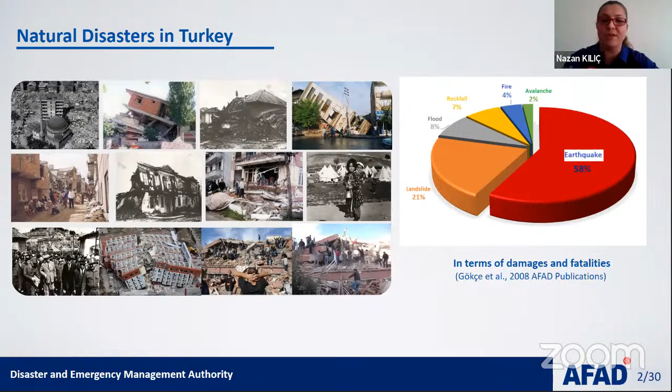The earthquake activity in our country and its surroundings has been observed by AFAD with more than 1,100 seismic stations, and the map shown in this slide shows the distribution of these seismic stations.

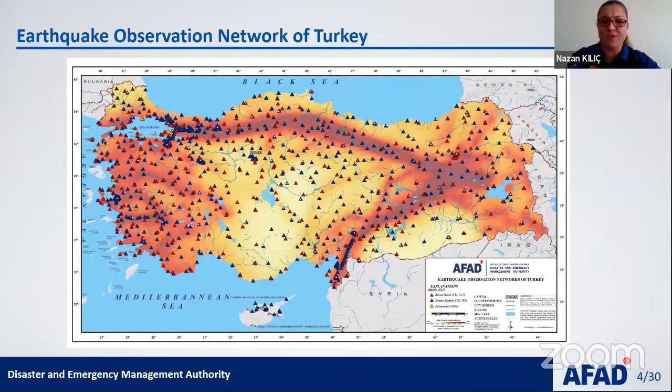If you look at the historical development of official earthquake zoning or hazard maps of our country, the origins of the first official map date back to the 1939 Great Erzincan earthquake. This earthquake was followed by a series of large earthquakes on the North Anatolian Fault.

In 1944, the law on measures to be taken before and after earthquakes was enacted. In accordance with one of the provisions in this law, the first earthquake zoning map of our country was prepared and published in 1945. This, due to increased information on the seismotectonics of our country, advances in engineering seismology and...

...developments in the world, this map was revised and published several times, and the last one, the earthquake hazard map of Turkey, was published in the Official Gazette in 2018, and it has been in force since the beginning of 2019.

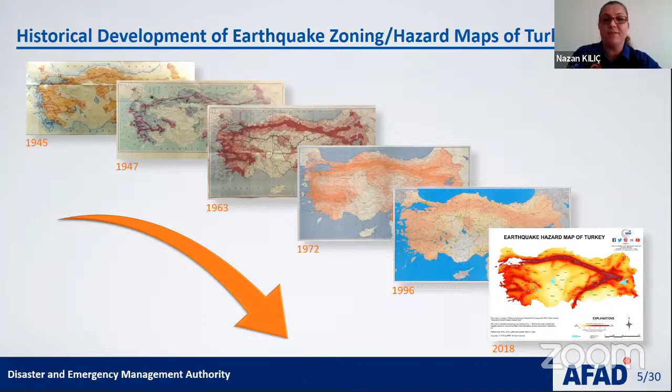The new earthquake hazard map of Turkey is one of the objectives in our National Earthquake Strategy and Action Plan, abbreviated as UDSEP-2023. This strategy and action plan can be defined as our national roadmap for earthquake mitigation.

The principal objective of the plan is to constitute new earthquake resistant, safe, well-prepared and sustainable settlements, and so to prevent or mitigate the physical, economic, social, environmental and political harms and losses that may be caused by earthquakes.

There are 7 targets, 29 strategies and 87 actions in the plan. They are presented under 3 thematic groups: learning about earthquakes, earthquake safe settlement and construction, and coping with the consequences of earthquakes. Although targets, strategies and actions are given under 3 thematic groups, they are mainly interconnected to each other.

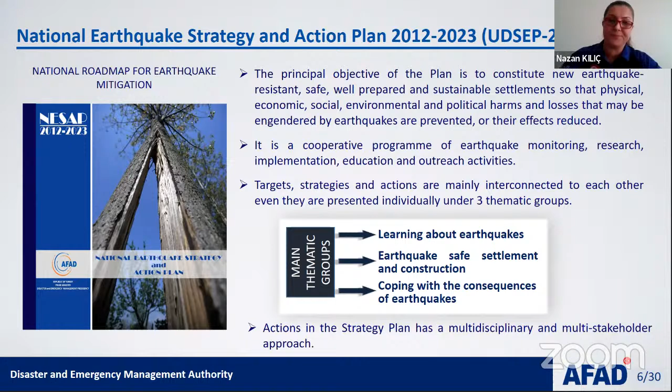In accordance with its general scope, risk reduction activities are dominant in UDSEP-2023, but there are some actions devoted to the development of emergency management and post-disaster recovery activities. So UDSEP-2023 contributes to the mitigation, preparedness, response, and recovery phases of the disaster management cycle.

Earthquake hazard analysis and revision of hazard maps are one of the objectives in UDSEP-2023. A project was initiated in 2013 to revise the previous earthquake zoning map of Turkey.

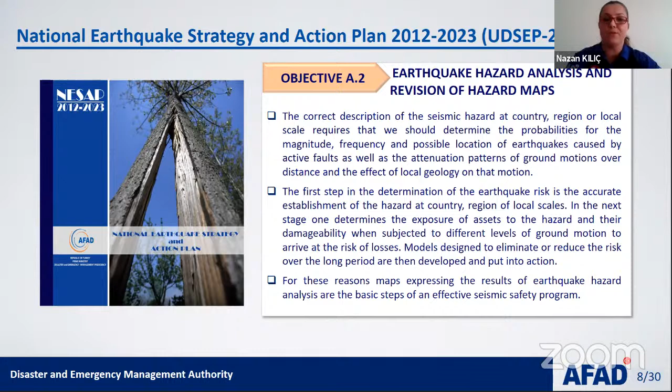The project, the revision of the Turkish seismic hazard map project, was supported by AFAD within the scope of the National Earthquake Research Program. The Turkish Natural Catastrophe Insurance Pool also supported the project.

The project team consists of researchers from 2 public institutions, AFAD and the General Directorate of Mineral Research and Exploration, and 5 universities: Boğaziçi, Middle East Technical, Çukurova, Sakarya, and Akdeniz universities.

In the project, probabilistic seismic hazard analyses were performed by utilizing up-to-date seismic source models, earthquake catalogs, ground motion prediction equations, and so on. Earthquake hazard maps in terms of peak ground acceleration, peak ground velocity, and spectral accelerations at 0.2 second and 1 second periods are produced for different return periods, that are 43, 72, 475, and...

...2475 years return period. I should note that these maps were produced for a generic rock site condition. The new earthquake hazard map of our country is a product of this project.

It shows peak ground acceleration values having 10% probability of exceedance in 50 years, which corresponds to a return period of 475 years. It does not include the hazards caused by local soil conditions like liquefaction, ground amplification, subsidence, and so on.

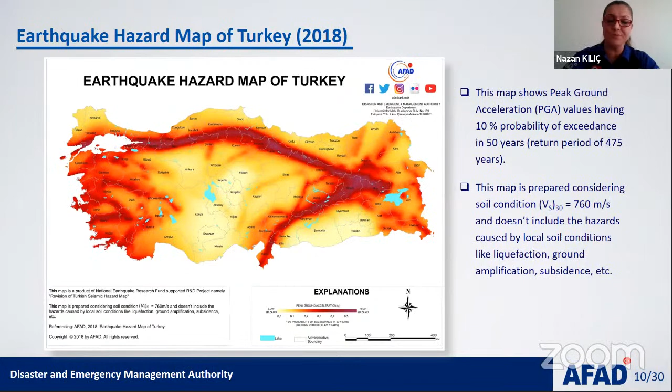In addition to the new earthquake hazard map of Turkey, the data on peak ground acceleration, peak ground velocity, and spectral acceleration at short and 1 second periods was...

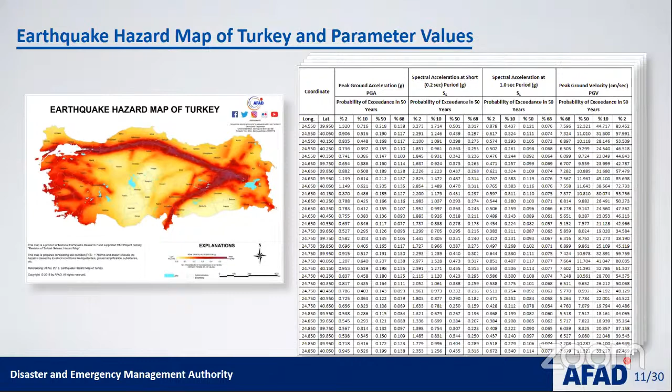...published in the Official Gazette for different exceedance probabilities in 50 years. So an interactive web application was developed, the earthquake hazard application, to view and query the earthquake hazard maps prepared based on this data in a web environment. This slide shows the general view of this web interface.

In this web interface, there's a map window and some tools, menus, and boxes on and at the left side of this map window. Now I'm going to introduce some of them.

The search box at the top left corner of the map window enables you to view an address on the map. When you type at least 3 letters of an address in this box, the application lists 10 addresses that are mostly related with this information. When you select among them, the application zooms in and shows it as a blue shaded area.

You can also search for an address by the address query menu. On this menu, you should first select province, then district, then village or neighborhood. The application zooms in on each selection and shows it as a blue shaded area.

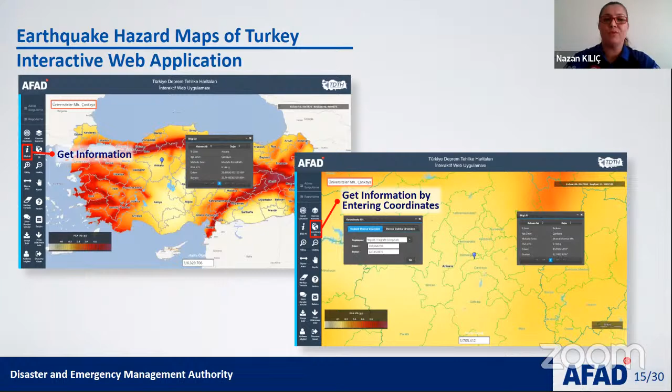After you specify the site, the information on the location of the site, like coordinates and the ground motion value obtained from the earthquake hazard map displayed on the map window, is shown on an automatically opened menu.

The reporting menu was also developed to present horizontal and vertical elastic design spectrum for a site specified by the user, according to Turkish Building Earthquake Code.

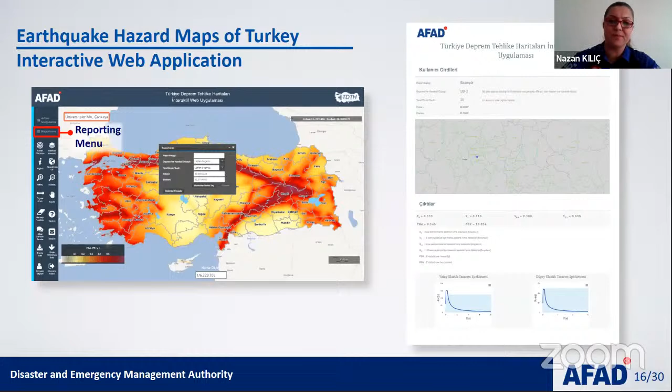Before mentioning the main improvements in the new map with respect to the previous one, I will very briefly talk about the previous earthquake zoning map of our country. This map was prepared using the Earthquake Peak Ground Acceleration Contour Map, constructed by probabilistic seismic hazard analysis methodology for a return period of 475 years.

5 different earthquake zones are defined in this map. The first degree earthquake zone is the zone with the highest earthquake hazard. A practical booklet providing the earthquake zone information of each district was prepared, and in order to determine the earthquake zone of a site, we used the information given in this booklet.

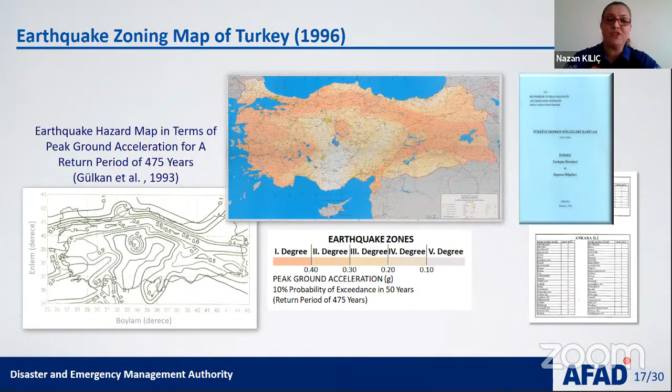As I mentioned before, the previous map shows the earthquake zones. The new map shows peak ground acceleration values instead of earthquake zones, so the earthquake zone concept was left by the new map. The previous map was prepared based on peak ground acceleration values for a return period of 475 years. On the contrary, new maps were produced in 16 different versions, in terms of 4 different ground motion parameters and for 4 different return periods.

Instead of the booklet used with the previous map, we can obtain the earthquake hazard of a site through a GIS-based, user-friendly, interactive web tool.

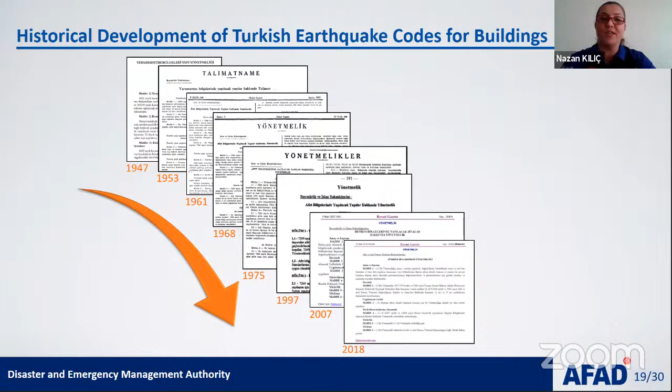Our country has had an earthquake code since the 1940s, and it has been updated and revised several times. The last one, the Turkish Building Earthquake Code, was published in the Official Gazette in 2018, along with the new earthquake hazard map, and it has been in force since the beginning of 2019.

Let me very briefly answer the question of why the earthquake code was updated. Because, in parallel with developing needs, information and technology, the material diversity used in building construction and the building models have increased. Advances in earthquake engineering, lessons derived from past earthquakes, and deficiencies observed in practice are other reasons for the update of the code.

Development in science and practice regarding seismic assessment and strengthening of structures is another reason. Revision and update of the earthquake code is one of the strategies in our National Earthquake Strategy and Action Plan. For this, a commission consisting of researchers with expertise in the area, as well as experts from public agencies and institutions, should be formed, and the activity of the commission should be made continuous.

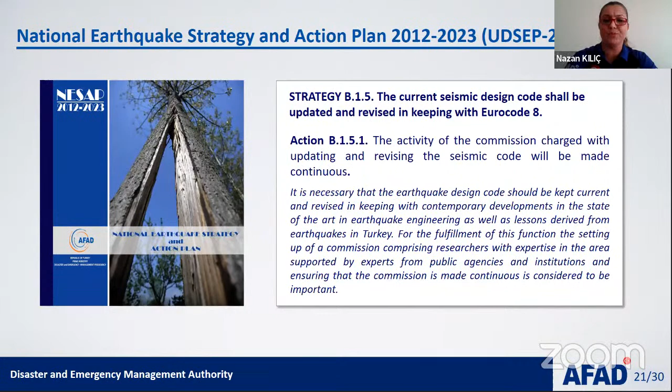Almost 112 experts took part in these sub-commissions and contributed to the Turkish Building Earthquake Code.

In addition to commission meetings and sub-commission meetings, two workshops were organized for all commission and sub-commission members to study together. Besides, 2 large-scale workshops were organized for all commission members and stakeholders to exchange their views.

Then a draft code was prepared and shared with all related organizations, institutions, and universities for their comments. The comments were assessed, and the code took its final form and was published in the Official Gazette.

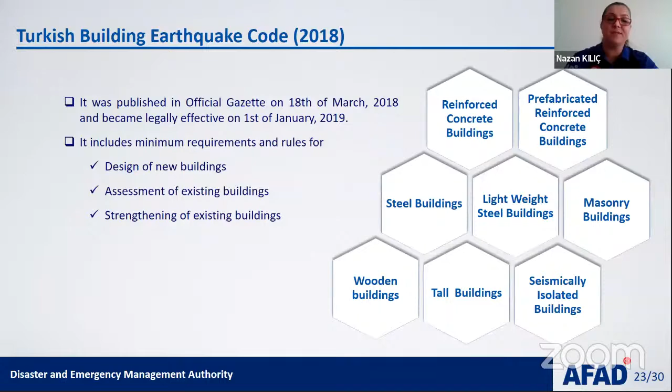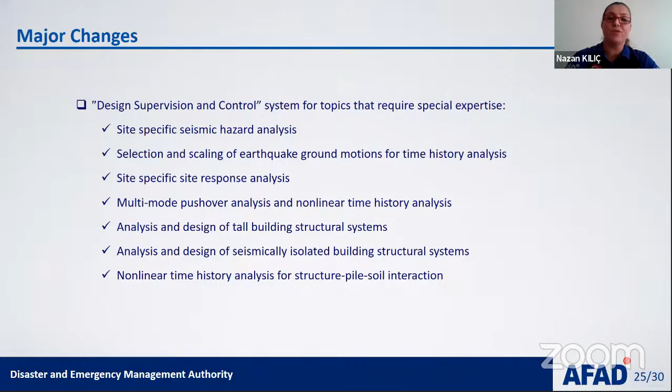If you look with respect to earthquake ground motion, new earthquake hazard map and its interactive web application are referred in the Turkish building earthquake code. Consistent with the earthquake hazard maps, 4 different earthquake ground motion levels are defined in the code.

In the previous code, we used the effective ground acceleration coefficients defined according to earthquake zone and spectrum characteristic periods defined depending on local site condition to construct the design acceleration spectrum. As for the new code, Turkish building earthquake code,

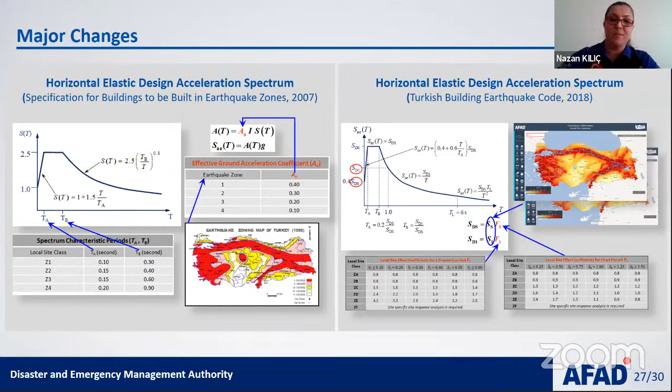Performance-based design is highlighted for tall buildings and important buildings with high seismic hazard in the Turkish building earthquake code. If I need to describe the design procedure in the code for these types of buildings as simple as possible, the preliminary design of the building is conducted by conventional strength-based design method under standard design ground motion.

Then it is assessed whether seismic performance of this preliminary design under specified ground motion levels satisfies performance targets defined for these ground motion levels. If they are not satisfied, the design is revised.

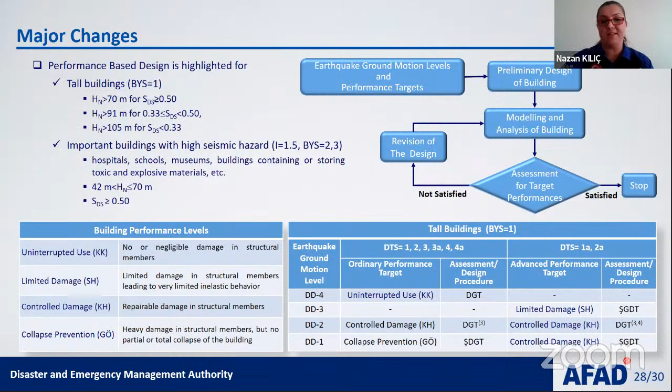Compared with the previous code, there are new chapters on tall buildings, seismically isolated buildings, lightweight steel buildings, and wooden buildings in the Turkish building earthquake code.

According to Turkish building earthquake code, structural health monitoring systems are mandatory to be installed on tall buildings. Due to public safety and economic reasons, it's important to rapidly assess the condition of tall buildings after an earthquake. Structural health monitoring systems help us to assess the current condition of the buildings in a rapid, remote, and objective way.

This is the end of my presentation. I would like to thank you for your kind attention.

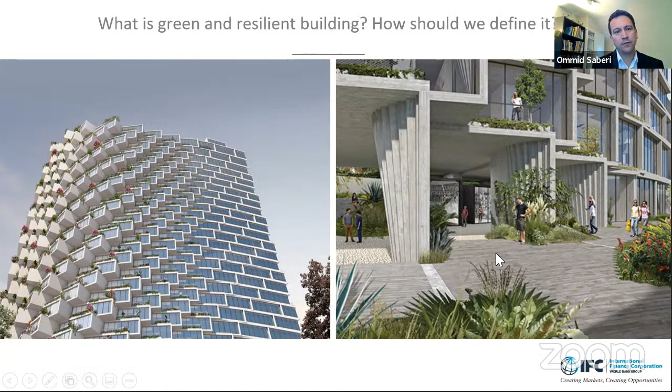So that's one side of the story. And the second side of the story is these days we are facing more and more challenges of climate change. And the good thing is that the Paris Agreement put in front of us a roadmap.

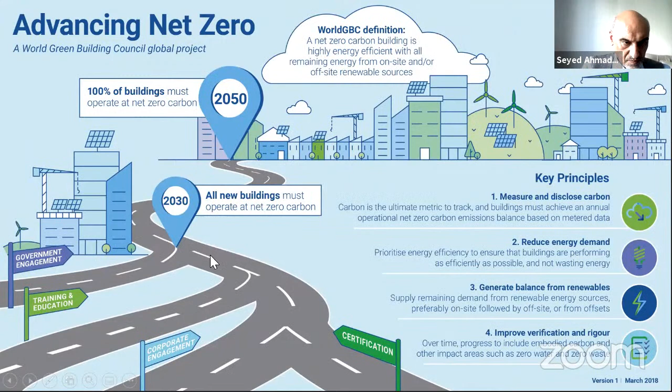This roadmap is published by World Green Building Council for the building sector. And what it says is that by 2030, which is 9 years from now, and time flies these days much faster, mainly this pandemic is making it run faster, by 2030, all new construction needs to operate at zero carbon. And by 2050, all buildings, so existing and new construction, must operate at net zero carbon. That's what we need to do in the building sector to meet the Paris Agreement requirements.

But for us to get to that point, as you can imagine, there is a huge task in front of us. The new construction still struggles to meet codes and still struggles to push to become efficient. And existing buildings is also a big trouble because retrofits are expensive and it's very challenging to convince anyone to do anything on existing buildings.

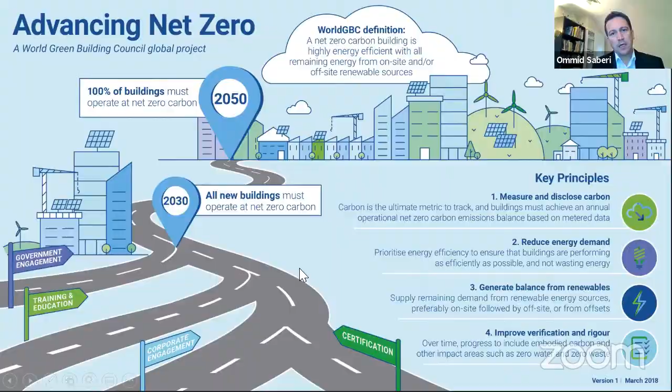So what we need to do is come up with certification processes, with corporate engagements, with training and education through universities like your university, and also with government engagements. So what we have done within the IFC to enable this move is we came up with a system called EDGE. EDGE stands for Excellence in Design for Greater Efficiencies.

It has 3 elements. There's a free application that everyone can access and calculate and measure, answering my own question of how can I calculate and measure my building. The second is what would be the standard. We came up with a simple standard of minimum 20% efficiency on energy, water, and materials. And if that minimum standard is met, then projects can apply for certification.

And there's importance about certification, which I'll come back to and explain why certification is critical in this value chain. Because if we have these two without certification, that will not work. I'm going to quickly demo how EDGE works and then come back to continue this presentation.

So EDGE app is available to everyone. You can access at app.edgebuildings.com. You can log in with your email address. Here I'm looking at homes. There are other building types here as well. I'm looking at Turkey, Ankara, and upper middle income house.

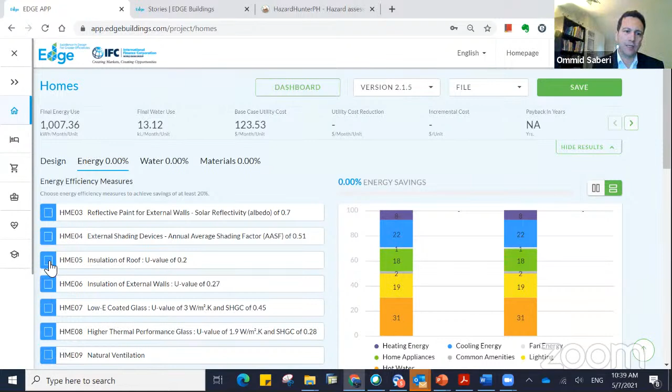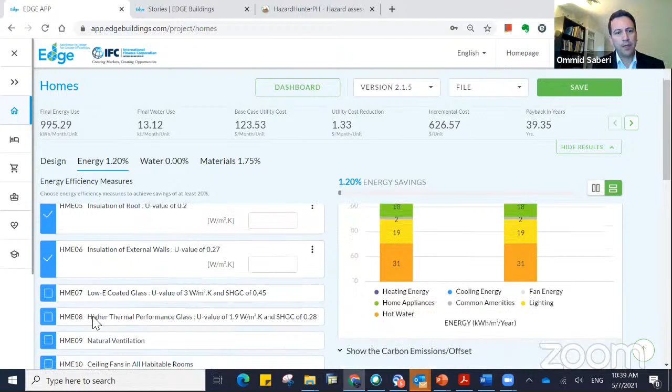And then you can start introducing different saving elements, saying that, okay, I'm going to add insulation to my roof with a specific U value, add insulation to external walls. EDGE already has Turkey regulations built in. So when we say add, it's adding on top of what the regulations already has in Turkey. And having a specific, say, air conditioning system, and it starts calculating your savings, and let's say heat pump for hot water system. And when you reach to more than 20%, you meet the energy requirements.

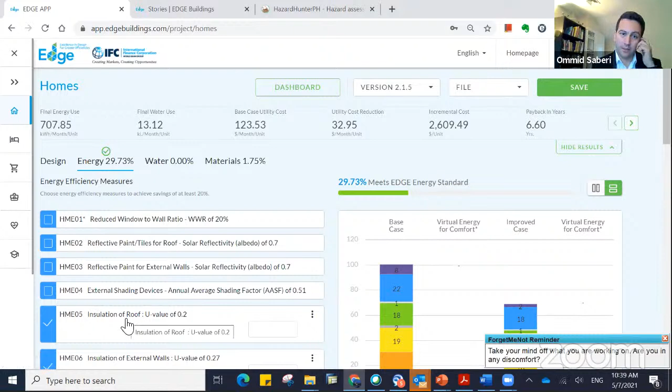We can dig into this information. There's lots of information behind the scene here. For example, you can read more about insulation of the roof in the user guide. There is water efficiency measures as well. This is very important for university students to take advantage of, because it also opens up research options here to look at the real consumptions against simulated consumption.

And on the materials, we are looking at embodied energy of materials with the view that we'll move toward embodied carbon in future, but looks at what kind of different materials, how different materials impact the embodied energy of each building element. And as I said, we have a lot of papers and information published on this application that one can have access to. Once this 20% is met, then the project can apply for certification.

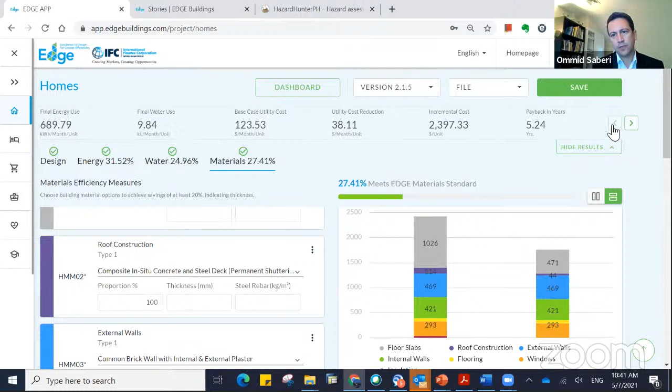I take your attention to these elements. It talks about $38 per month would be utility saving. So this is each housing unit will save $38 per month on their utilities. This is the incremental cost, and this is the payback period in years. So it displays all this information, and also it gives you the GHG saving per housing unit, how much GHG emission will be reduced.

I'll go back to the presentation here and continue. And I encourage you to have a look at this application if you find time.

So what kind of buildings can be certified on EDGE? Then practically all types of buildings. We have hospitals certified and homes certified in Turkey, and there are different projects that are going through the process. It can be used for new construction, for existing buildings, and refurbishment. And we are seeing, given COVID, there's more attention to refurbishment.

EDGE has three levels. It has the certified level at 20%, EDGE Advanced, and then it has zero carbon certification. So projects can go through these three steps to get to zero carbon certification. Remember the slide I showed about the path to zero carbon? So EDGE provides that path to zero carbon certification.

These are some of the projects that are certified in Turkey and other regions. You see, maybe you recognize some of these in the skylines of Turkey. We also have hospitals certified in Turkey. And the interesting thing is that it's also being used for affordable homes or low-income homes certification in other countries.

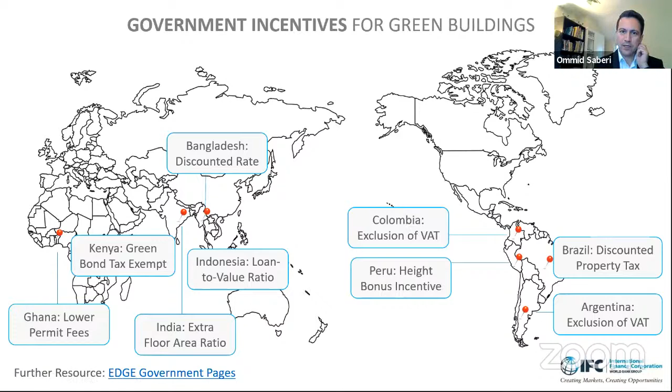We have programs to hire and train EDGE experts, and EDGE experts are licensed by IFC and can work in all countries around the world. These trainings are available online. We did a large training in Turkey back in, I think, 2017, but we have these trainings ongoing globally.

So that was our story on EDGE. There are quite a lot of videos online that you can look at to see how it's been used in different sectors. But using that experience, what we came up with was a solution for resilience as well. The issue was that everyone was asking us, why don't you combine these two and make a building green and resilient in a single standard?

But that was not possible. We wanted to make sure that resilience has its own sister system to EDGE rather than having one system. So we came up with the Building Resilience Index program.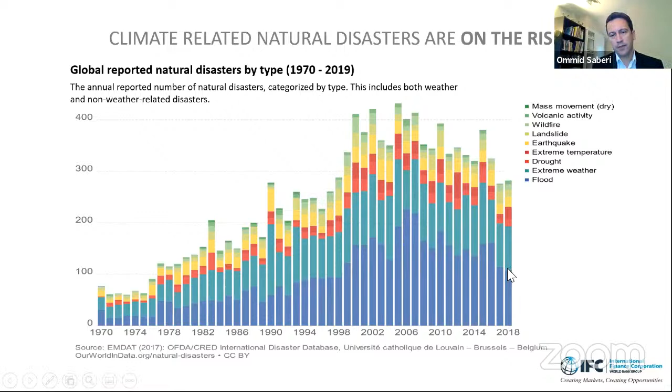This is something we are seeing happening every day in some corner of the world. And these disasters are very costly for economies — some economies lose a good percentage of their GDP to disasters, mainly the island countries. So it's very important for us to come up with solutions.

And obviously in Turkey you have been experiencing earthquakes, as we heard from Dr. Nazan. So it's important for us to figure out what we can do. Turkey is one of the advanced countries in earthquake preparedness, but I think there is still room for us to improve our work.

What we are doing on resilience has 4 elements: wind, water, geoseismic, and fire. So resilience would be based on these 4 elements from a building point of view, and each would have its subcategories of elements.

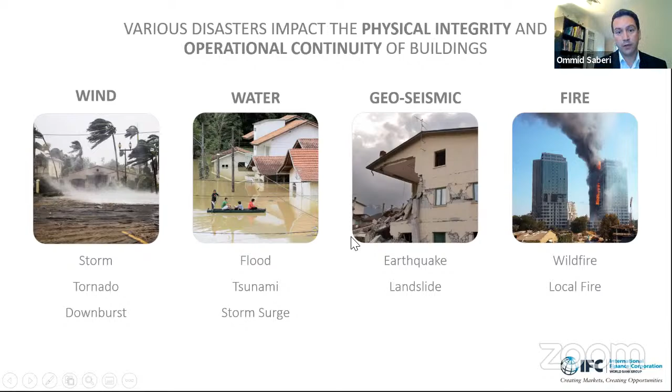I'd say something else here: this relates to the physical integrity of the building — keeping the structure sound — but there are also measures of operational continuity, which is important to keep buildings operating after the disaster. So those are the 2 elements together under these 4 verticals.

Why is this important? I guess it's important for everyone, but one element I'd like to highlight is that we want to make sure financial institutions and banks understand the benefit and importance of resilience and come up with financial solutions to support this sector. That's our focus area.

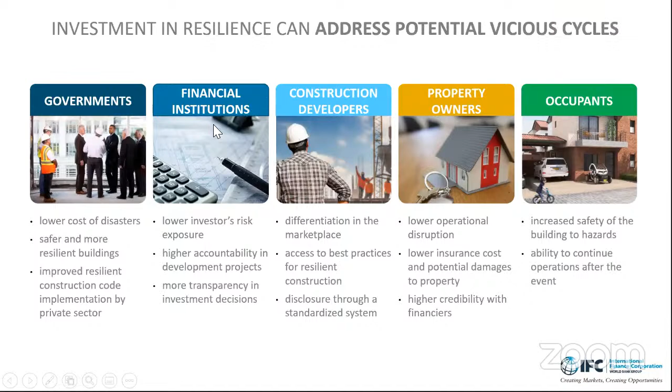When we look at most countries, we see issues with data, as we saw Turkey is developing hazard maps, which is great. And these hazard maps need to be kept updated and relevant all the time.

On know-how, there are some gaps, mainly in inspection of construction. We see issues in inspection of construction. And on increasing awareness among financial institutions and policymakers, in some countries bureaucracy can create a bottleneck to resilience.

So what we came up with is a solution called the Building Resilience Index. It has 3 key components. Number 1 is how do we identify risk? How do we know, if I'm an architect building on a specific site, what are the risks in that site, and how my design can contribute to solving those problems.

So number 1 is to understand it, number 2 is to solve it, and number 3, which is important, is how are we going to disclose it. Because if it's not disclosed, regardless of how good or bad your design is, it's very difficult to come back and judge or compare projects.

So on identification of risk, we want to collaborate with different entities around the world to bring hazard maps together, using similar standards, so architects and engineers can access that data freely and easily. This is work the World Bank has done with the Philippines government, and the hazard maps for the Philippines have already been released.

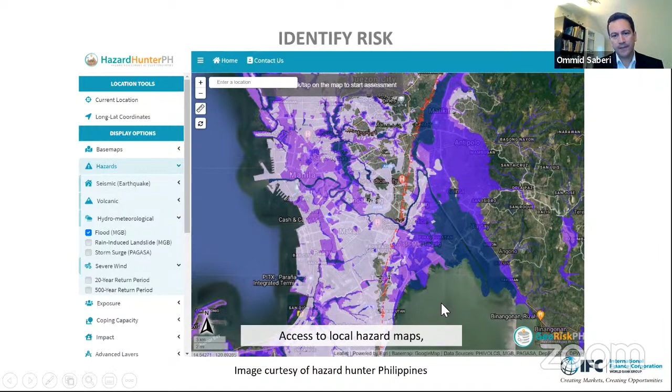The second piece is, now that we have identified the problem, how can we solve it? That goes back to engineering solutions and the guidance for engineers to follow. Part of that is national codes, but part is also global best practices. How can we ensure national codes are fully implemented at design, construction, and supervision? And what can we do to go beyond codes to global best practices? Then measuring the cost of those elements so we can communicate that. Some people feel a resilient building will cost twice as much, but in reality it may cost 5% to 10%. So that's where we want to bring more transparency to the cost.

The Building Resilience Index has 5 levels. It starts from R, which is risky, and goes to A+, which is the best building one can design, with everything in between. B is the code, national code level, so even a B rated building is a very good building. A is global best practices, and A+ is global best practices plus operational continuity measures. That's how these 5 levels are defined.

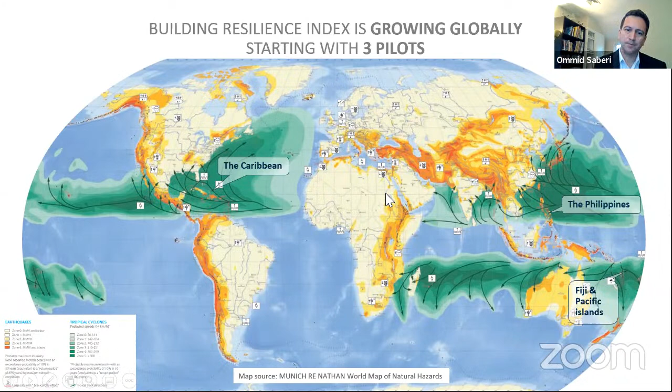What brings all these pieces together is that IFC works with direct investments, with the banks, with the governments, and also with certification solutions. So what we want to do is build the ecosystem by connecting these pieces together so that the market starts moving forward, given the players are all in place.

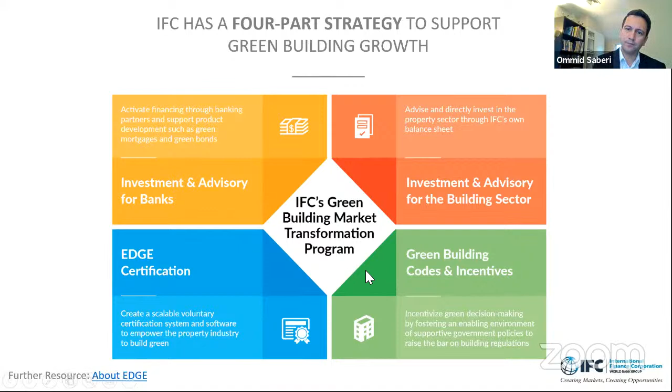I'd like to thank our donors. This program, the EDGE program, has been supported by the UK government, which is helping us develop the program as well as develop incentives through the banking sector. Also, the Swiss government has supported our program's growth, and we collaborate with the Swiss government plus other governments like the European Union, Japan, and others supporting this program. On resilience, the main supporter has been the government of Netherlands, and we are very thankful to them. Recently we started collaborating with the Australian government's Department of Foreign Affairs and Trade, and obviously the World Bank Group. We acknowledge the contributions from the organizations that supported our program's technical development.

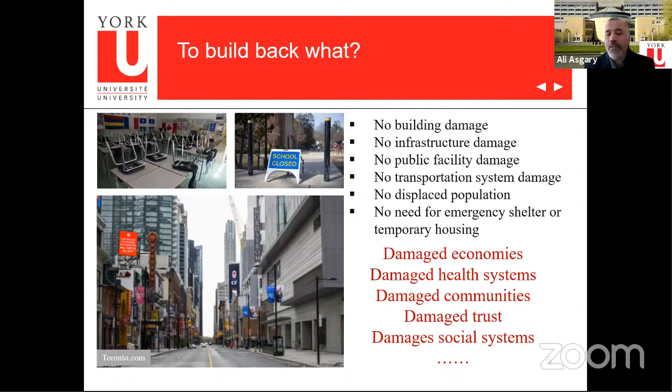But we know also that there was significant damage to the health system. When we say health damage, it's not necessarily the physical damage, but damage to the system in terms of health and provision of health services, and the people running these services, and damage to communities in different aspects, including social and mental issues. We have had experiences of, and are still experiencing, damage to trust between different sectors of society, between governments and people, between people and agencies, and there has been a lot of problem in terms of damage to overall social systems. So we have damages in different ways or meaning.

Now, briefly speaking, when we talk about Build Back Better, although the literature goes far beyond this particular case, more or less people agree that the wider use of the Build Back Better concept after disaster started with the post-tsunami South Asian tsunami, where many countries were impacted, and Clinton was an ambassador for leading the recovery process of that region at the time. As part of that process, they developed what is called the key propositions for Building Back Better, and this concept came into mainstream discussions of disaster and emergency management from that time.

No need for me to go into details, but overall these 10 propositions really aim to make sure that post-disaster recovery and reconstruction uses this opportunity, or disaster, to change how governments act, how communities and societies are governed, how coordination among different stakeholders is handled, and how we can make the recovery a process where, if you go back and compare what you now have with what you had, you certainly feel this is a better achievement, growth and development. So it is really about that.

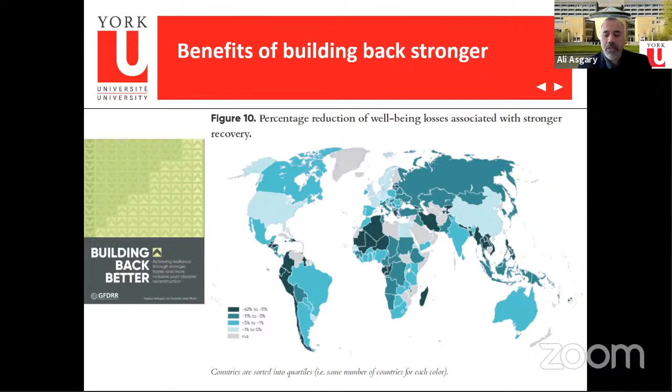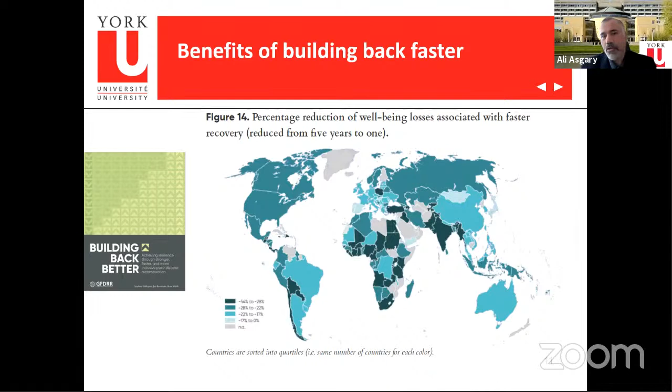In terms of reducing well-being loss, this is the same for the other one, the benefits of building back faster, meaning that if you build faster, you provide more benefits to your people. As you can see here, Turkey is highlighted in a darker color, meaning speeding up the recovery process would gain a lot more for the people. Again, this is some sort of valuation, putting values into these concepts just to highlight how important it is to have this component of building back better.

There are obviously a lot of academic discussions around this topic, which at least shows there is a significant relationship between what we call build back better on one hand, and other discussions, nicely presented by our previous speakers, about resilient and sustainable development. We definitely want to make sure that our post-disaster recovery and reconstruction meets both concepts and aligns with them. But not all countries, not everybody, not what we see in terms of post-disaster recovery and reconstruction necessarily meets this, but you can see that relevance.

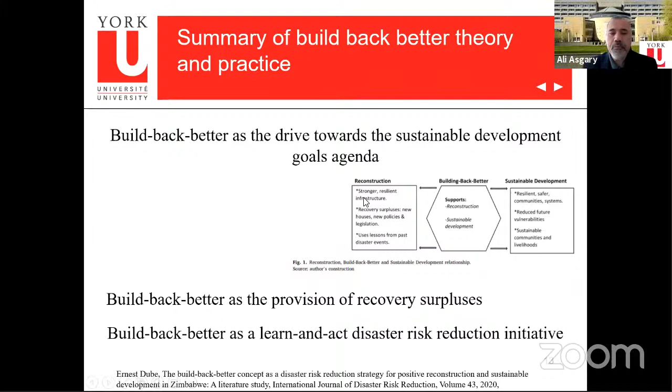Now, as I said, there are also ways to measure this. There are lots of efforts that you can use to measure this kind of concept, one of which is listed here.

Now, in the context of the COVID-19 situation, the good thing is that the global community has already started thinking about this. I have seen, and you may also have seen, at national level and other levels, discussions, documents, papers from different groups coming together to discuss this, because it is important. It is really a question that we need to answer right now: what kind of recovery and reconstruction are we talking about when it comes to the COVID situation? So we are building this capacity to at least understand the situation and hopefully plan something that helps us go to a better recovery here.

But I would also want to mention that there are lots of controversial discussions here, because first of all, not everybody really agrees with the concept. So we may even not be able to use this concept in the context of the pandemic unless we make some changes in the phrase or redefine it in some way. This is an example of that, which basically disagrees with the concept in this context.

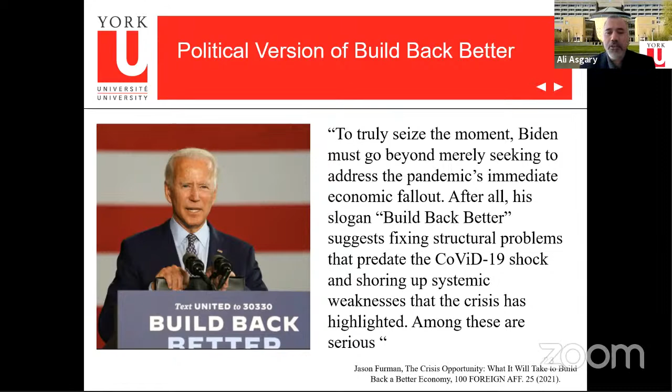Now, to summarize all these things, I would say that we definitely need to build back better, but this goes all the way into all elements of society. It should be much more comprehensive, more complex, long-term, and thoughtful, planned globally together with every element of society. Otherwise, we will probably experience a very bad post-pandemic recovery, which may not necessarily be what we call Build Back Better. Thank you very much.

I was happy to meet and visit your beautiful city in 2019. I had a great experience visiting your different architectural, entertainment, and museum sites in your city. I wish I could travel again to your place. It was the last travel I had before the pandemic. Thank you very much for listening, and all the best.

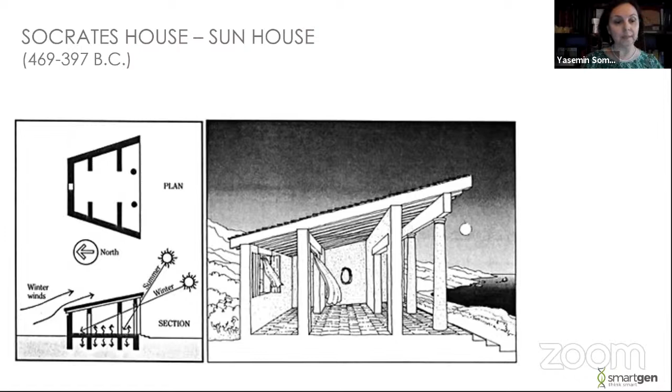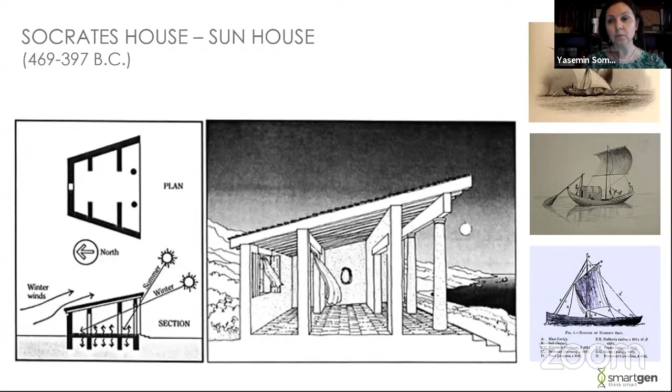The large eaves on the south facade prevented excess solar radiation in summertime from entering the building. In those times there was no glass, so shutters and textiles were used as much as possible, along with the heat of the soil. Going even further back, in the 5th century before Christ at the Mediterranean Sea, people used wind energy for sailing, transportation, and business.

Coming to the 1st century before Christ, Marcus Vitruvius Pollio, a very famous Roman writer, architect, and engineer, prepared his 10 books on architecture. Within these books, he discusses different buildings and cities, how they should be located, how they should prevent excess wind, and how water is brought to the cities.

In the 19th century after Christ, ASHRAE has been standardizing most construction issues, issuing many standards used today in almost all countries in the world. Actually, last month they published the first review document for zero net energy and zero net carbon buildings.

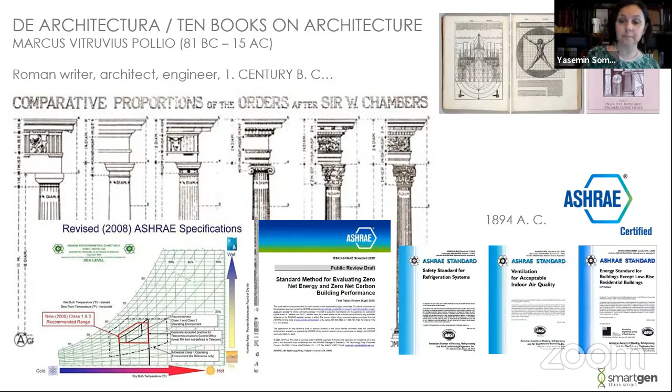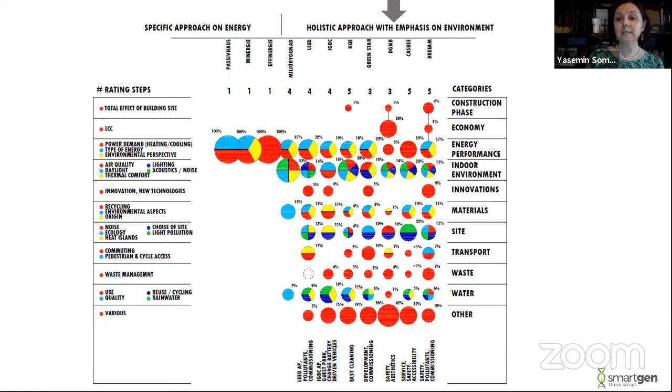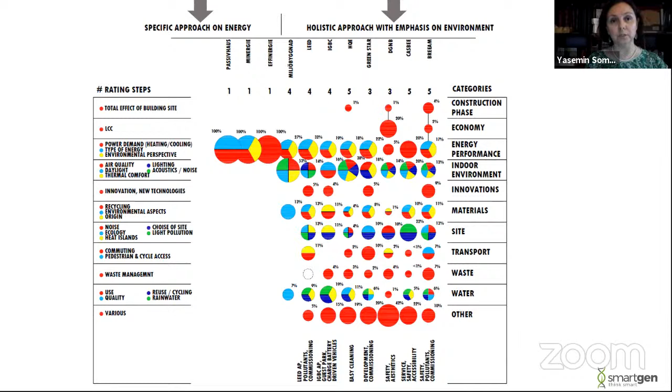Basically, the certification systems can be divided into two main groups: those with a holistic approach emphasizing environment, and those with a more specific approach on energy. LEED, BREEAM, DGNB, and similar certifications fall within the holistic approach, whereas Passive House, Minergie, and Effinergie specifically look into energy issues. Even dividing these certifications into these main groups, we see they have many different rating steps and categories, and the weights of these categories differ from one another.

So after looking at all these certification systems, I would briefly like to give an explanation of zero energy buildings. The most basic and simple definition of a zero energy building would be that these buildings require a very low amount of energy for their heating, cooling, ventilation, lighting, plug loads, and other consumption, and are fully powered by renewable energy sources, either on site or off site.

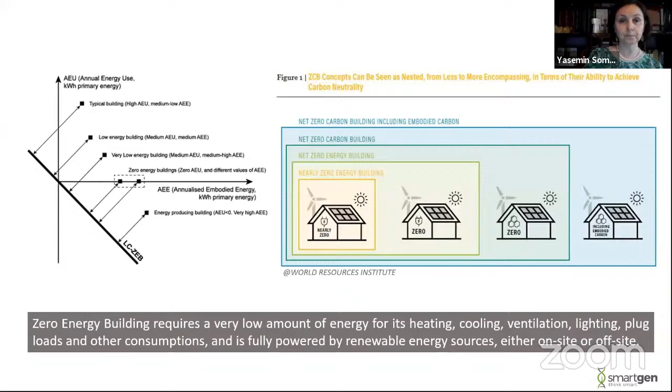These zero energy buildings have four main principles. First, reducing the energy demand for all newly constructed buildings. The energy demand value is the sum of the demands of the building: space heating, space cooling, domestic hot water, auxiliary energy, ventilation, lighting, and appliances.

Secondly, improving indoor environmental quality, allowing maximum thermal comfort and avoiding overheating. This includes air quality control through mechanical ventilation.

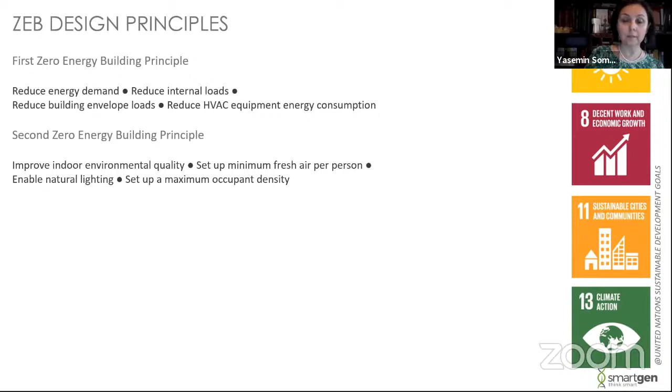Thirdly, fixing a percentage of renewable energy demand to be covered by renewable energy annual balance. It is also important to add additional measures to address energy matching and storage issues.

Fourthly, reducing the overarching value for primary energy consumption and carbon emission per year. It is also important to add additional measures to address mobility and materials embodied energy issues.

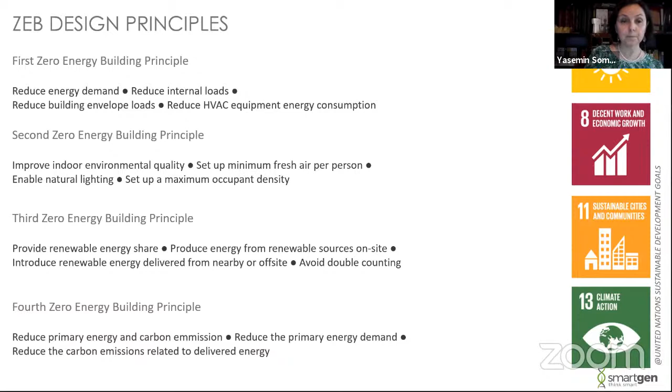Actually, when we are talking about zero energy buildings, it is very important to discuss the different phases which can lead to a zero energy building. When we look at the present culture and the present system which is being implemented, we see that the different stakeholders, or the project phases and construction phases, are working in a sequential manner.

And when we look at this very simple, basic, generic workflow, we see that the building facilities are not included. Actually, when we are designing buildings, it takes between 2 months up to 1 year to fulfill this phase. And according to the financial situation of the building owner, construction may take between 1 year up to a few years. But when we talk about the facilities of buildings, normal buildings would last up to 60 years. And if we are talking about cultural heritage buildings, we are talking about buildings which would last a few hundred years.

So in order to come up with zero energy buildings, it is important to include the stakeholders from the beginning of the design stage and come and go, having a circular working flow rather than a sequential working flow.

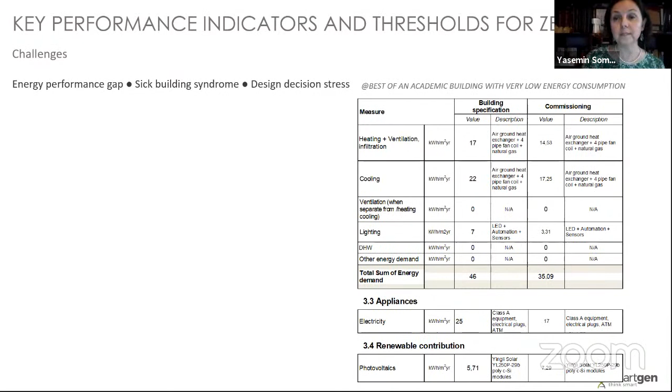We as designers, architects and engineers all agree on the numbers and targets on this table. Once we agree with the engineers on this table, as an architect, I can design a cylindrical building, a pyramidal building, or a rectangular building. I can bury my building under the ground, or build a skyscraper according to the wishes of the building owner, as long as I and the engineers all agree with the targets on this table.

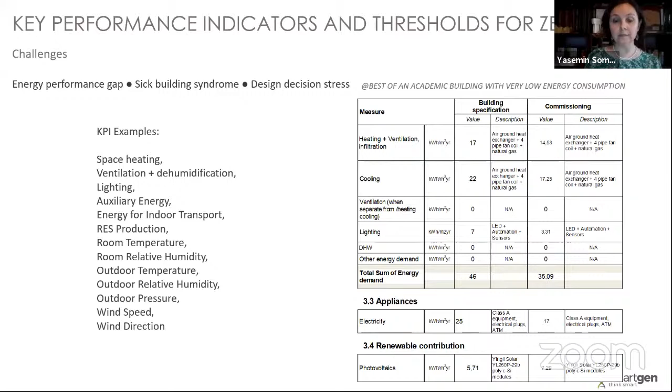Here I'd like to talk more about the key performance indicators and performance thresholds of zero energy buildings. The first is the carbon emissions threshold. To meet the high performance target of these buildings, the European Union suggests that an overarching primary demand and carbon dioxide emissions threshold associated with energy demand should be below 3 kilograms of carbon dioxide per square meter per year.

The second threshold would be the minimum energy efficiency threshold. There are significant differences in the definition of minimum building energy efficiency threshold performance worldwide. The disparity is mainly due to climatic, social, technological, and economic variation between countries.

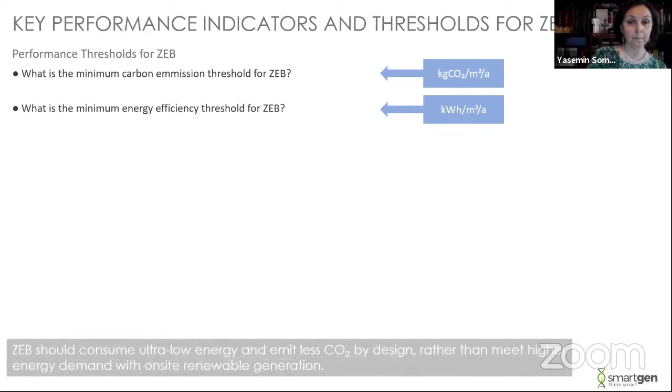The third threshold is the heating and cooling balance. The necessity to solve potential conflicts between winter and summer comfort objectives indicates a higher probability of having to install both heating and cooling systems and to bear the associated costs.

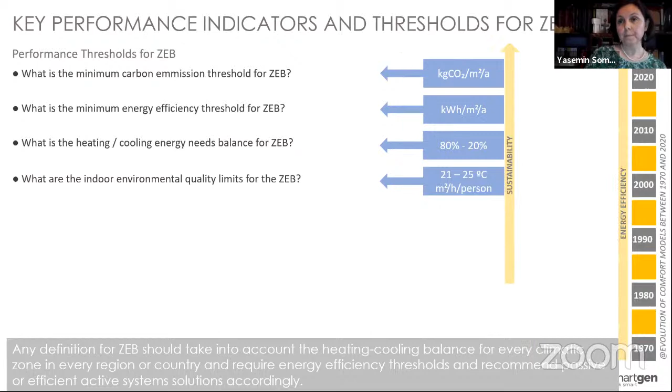The next threshold is indoor environmental quality limits, or in other terms, thermal comfort. The available models worldwide are mainly focused on office buildings, partly because of the limited number of surveys in the area of residential buildings. However, the scope of these standards can be extended to other buildings of similar type used mainly for human occupancy, with mainly sedentary activities and dwellings.

For zero energy buildings, short and long-term comfort indices should be calculated according to EN 16798, in addition to energy performance indexes. The connection between thermal performance and comfort is explicitly discussed in EPBD. Also, various organizations have made proposals for comfort targets.

The next threshold is the renewable energy generation threshold. For zero energy buildings, it is necessary to first reduce energy needs for heating and cooling, and second, to cover a significant portion of those needs by energy from renewable sources on-site or nearby. However, many new constructions worldwide fail to take up ultra energy efficient and renewable energy measures that are cost effective.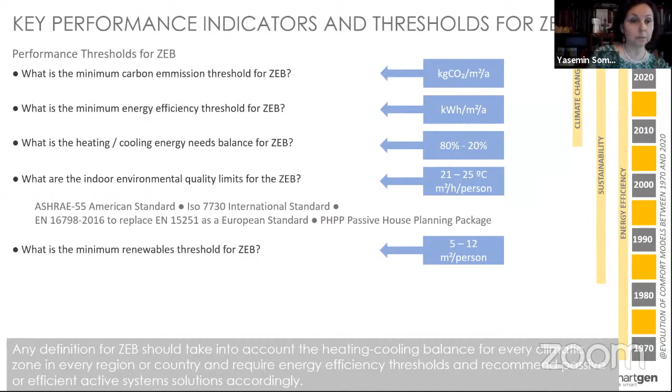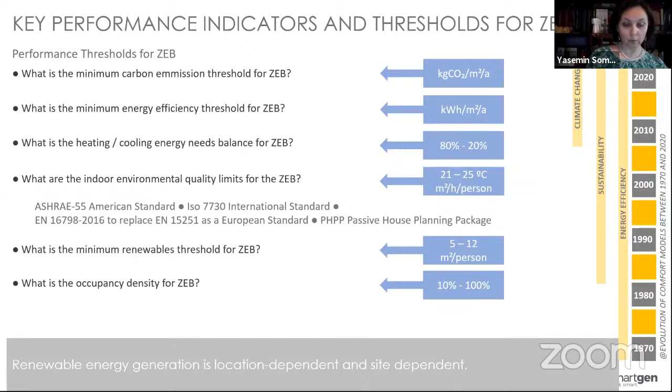The next threshold we look into is occupancy density. Design teams should take into account the importance of occupancy density and need to design for diversity, allowing densities to be raised locally in buildings. Building capacity is a crucial design performance threshold because people create the demand for indoor environmental quality and building services. Post-occupancy evaluation studies should be encouraged to close the carbon and energy performance gap and achieve higher productivity and satisfaction of users in zero energy buildings.

The last threshold I would like to discuss is the cost threshold. In order to design and construct zero energy buildings, cost effectiveness is essential. Design teams should focus on cost modeling to come up with rough estimation of cost per square meter for zero energy buildings in different typologies early on in the design stage.

Zero energy buildings have proven to be technically feasible, in some countries cost neutral, and in some countries costing 15 to 30% more compared to conventional buildings. In all typologies, buildings require high insulation levels, technical installation of HVAC and heat recovery systems, as well as more capital-intensive renewable energy sources like photovoltaics. By time as the market takes up for zero energy buildings, the investment cost will be reduced.

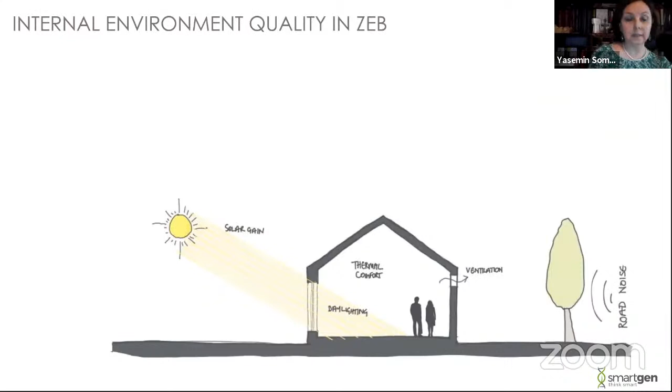Now I'd like to talk briefly about the internal environment quality in zero energy buildings. Designers are responsible for enabling and empowering users to assess and measure the outcomes of their design in relation to air quality, thermal, visual, and acoustic comfort. At the same time, zero energy buildings built today should last for at least 60 years and allow the adaptation and evolution of building use and the combination of professional and living activities while maintaining a high standard of internal environment quality.

The first challenge that design teams should be aware of is health compliance versus energy compliance.

Finding a balance between zero energy building tightness and internal environment quality is not easy. Zero energy building tightness is associated with energy efficiency, while internal environment quality is associated with high energy consumption. Zero energy buildings are by default tight and should avoid leaking of envelopes and ductwork to achieve energy efficiency.

The second challenge is to guide decision-making in internal environmental quality design and provide exemplary assessment and control. There are many indicators and design targets to achieve internal environment quality. Integrating air quality and ventilation, thermal comfort, daylighting and views, acoustic comfort, interior design, and personal control are critical to successful internal environment quality.

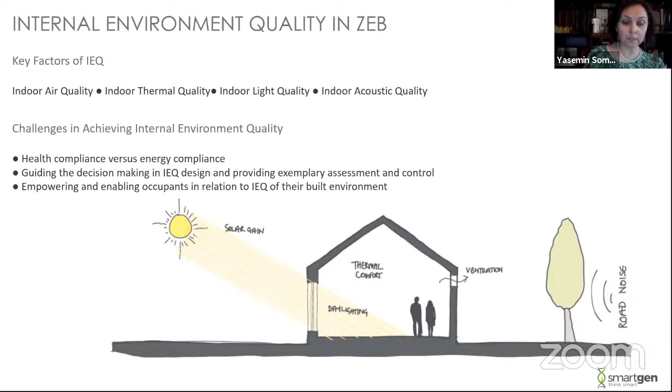As we talk about internal environment quality, we cannot neglect the outdoor environment quality too. We are witnessing increasing urbanization around the world. Cities are increasingly concentrated to host more economic and social activities. Urbanization increases the risk of air and noise pollution and microclimate change, and therefore the negative impacts of extreme urban climate and pollution concentration are becoming more important.

We need to understand the risk associated with the outdoor environment of zero energy buildings because people need air exchange for a healthy indoor environment. So the first risk I will talk about is poor air quality.

The World Health Organization, which monitors air pollution in all parts of the world, confirms that more than 80% of people living in urban areas are exposed to low air quality levels. As people spend 60-90% of their time indoors, they are exposed to indoor air pollution that can cause serious long-term problems. There is increasing evidence in medical literature that air pollution is linked to heart disease, lung cancer, worsening asthma, and poor lung development in children, causing more than 100,000 deaths in Europe in 2016. Outdoor air pollutants are mainly nitrogen dioxide, sulfur dioxide, ozone, carbon monoxide, and particulate matter of various sizes.

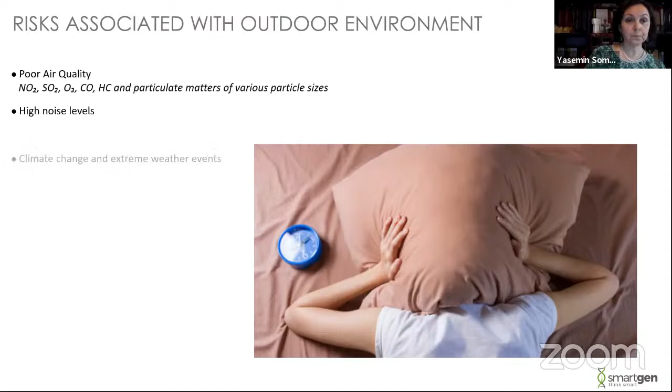Extreme heat and cold episodes are becoming more frequent in cities around the world. Since 2000, cities around the world have experienced prolonged high temperatures and humid hot summers for weeks. A recent report from the World Meteorological Organization and the United Nations Environment Programme predicts a decrease for heating degree days and an increase for cooling degree days by 2040. Evidence from the literature shows that the frequency and severity of extreme weather events have increased significantly over the past 20 years and will continue to increase unless drastic measures are taken to reduce greenhouse gas emissions.

As a result, energy regulators and companies have issued warnings that power grids in many countries will not be able to provide enough power to meet demand from air conditioners during heat waves. To cope with climate change and extreme weather events, zero energy building design can prepare buildings for such scenarios and risks that will arise more frequently in the future.

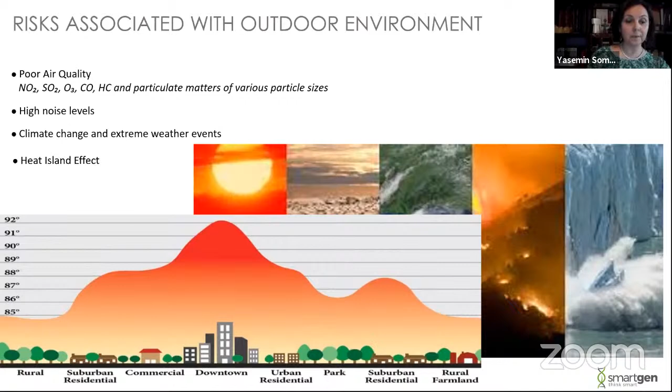Urban heat island reduction policies, including green infrastructures, street vegetation or green sidewalks, and green roofs, can lower the average air temperature by 1 to 3 degrees Celsius on hot summer days. Therefore, it is important to take into account urban heat island effects and associated heat stress that may affect indoor air quality in zero energy buildings.

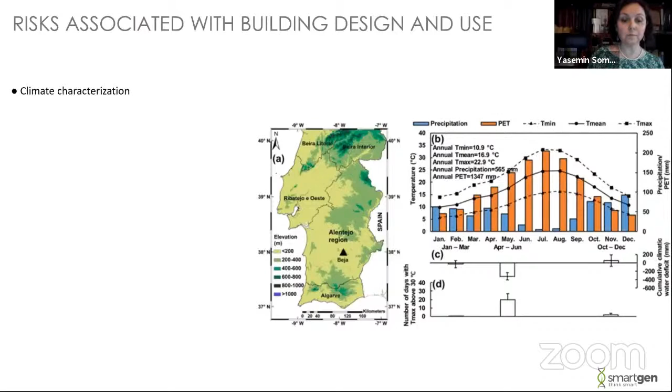Quickly, if we go through the design and use stages risks, we can talk first about climate characterization. Designers often use climate classification systems, indicators, or daily comfort deviation thresholds for human comfort to evaluate a particular climate. However, we are faced with climate change and massive urbanization, as well as microclimate changes around the world, which jeopardizes the accuracy of the classifications. Basic climate characterization should be based on new and climate-sensitive indicators and temperature thresholds that represent the true microclimate of the project site.

Two elements in zero-energy buildings can cause overheating. The first is related to the weak shell and design of HVAC systems, while the second is related to poor estimation of internal heat gains and user density.

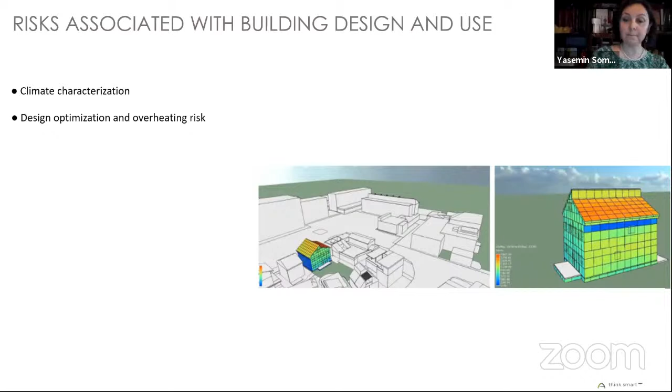Evaluations of zero-energy buildings after commissioning show that building usage and occupancy density has changed, and users adapt the environment to the expected functional and hierarchical work order and methods over time.

A procedural framework should be planned, designed, and followed during construction and operation to ensure indoor quality. Verification and quality assurance of indoor air quality should be provided through energy management systems that monitor indoor air quality, thermal comfort, lighting, and acoustic environment.

Source control and filtration maintenance protocols should be designed early in the process, and facility managers should be assigned. Since zero-energy buildings are airtight and well insulated, build quality must be very high to prevent leakage, heat transfer, or deterioration of the HVAC system.

I briefly explained zero-energy buildings, and I also mentioned that every country has their own policies and their own construction culture. So it is very difficult to come to a common target and common understanding in zero-energy buildings. Every country would have their own targets.

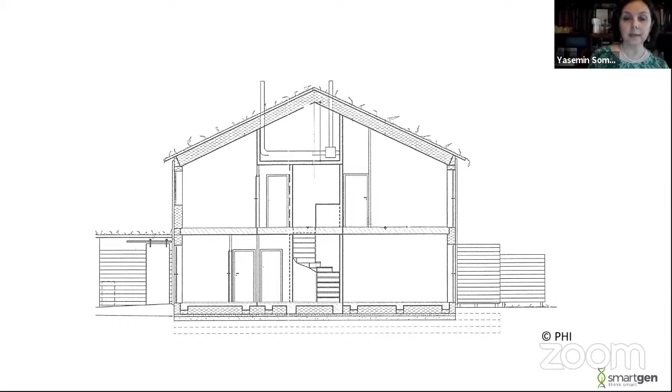But I would like to briefly give the basic principle of passive houses. Passive house standards are actually a prototype for all - they are the same for all climates, for all countries, and they can be constructed anywhere in the world.

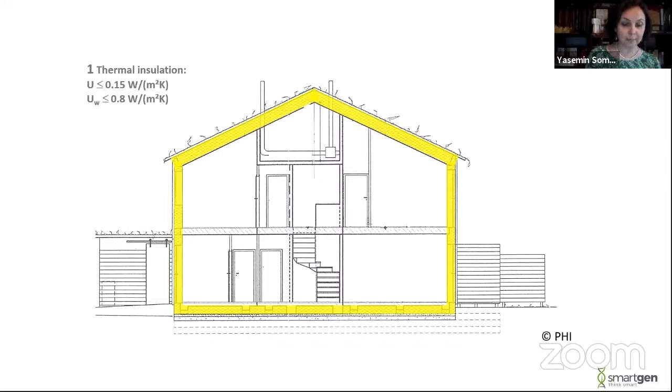The passive house has a high value heat protection all around the building. The opaque components like roof, external wall, and floor slab have U values of up to 0.15 watts per square meter Kelvin. This corresponds to an insulation thickness of between 25 to 30 centimeters when standard insulation materials are used.

The insulation and windows are installed without thermal bridges. The windows have a U value up to 0.8 watt per square meter Kelvin. For this, insulated window frames and triple glazing are essential. The glazing has a high total solar energy transmission factor, G of 0.5 to 0.55 as a rule. The solar radiation contributes to the reduction of the space heating demand.

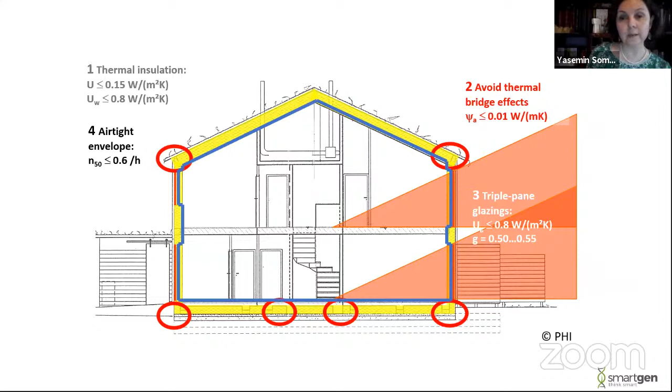The thermal building envelope is enclosed by one airtight envelope. This may be interior plaster, timber-based boards, or membranes. Airtightness must be tested using a pressurization test. At 50 Pascal, the air change should be 0.6 per hour.

All rooms inside the thermal envelope are ventilated by a ventilation system with heat recovery. The heat recovery rate must be at least 75% so that efficiency as well as room comfort can be guaranteed. The total ventilation electricity demand should not exceed 0.45 watt-hour per cubic meter.

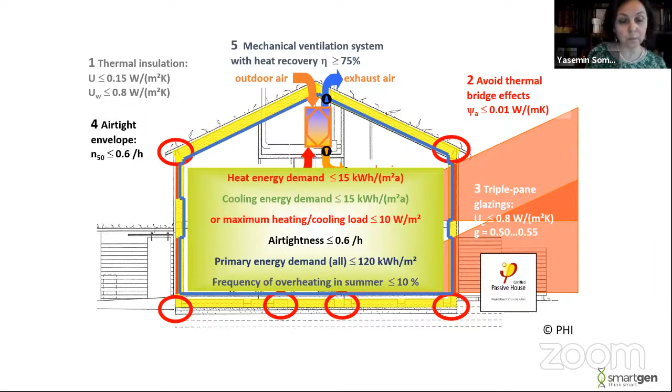Electrical appliances are designed as energy efficient. Large glazing areas on the south side, and glazing towards the east and west, are fitted with sun protection positioned on the outside so that in summer the solar load can be minimized.

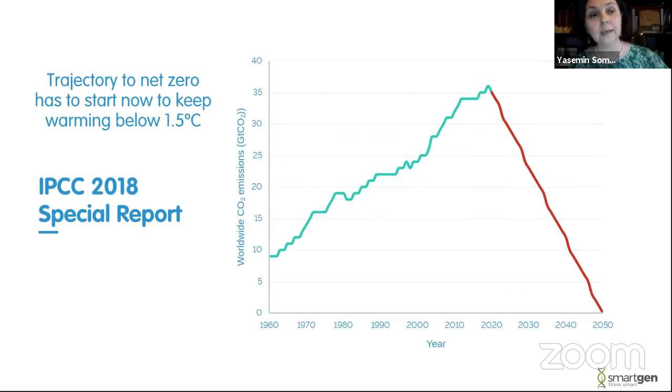If we are targeting to keep global warming below 1.5 degrees Celsius by 2050, we have to act now and we have to start immediately.